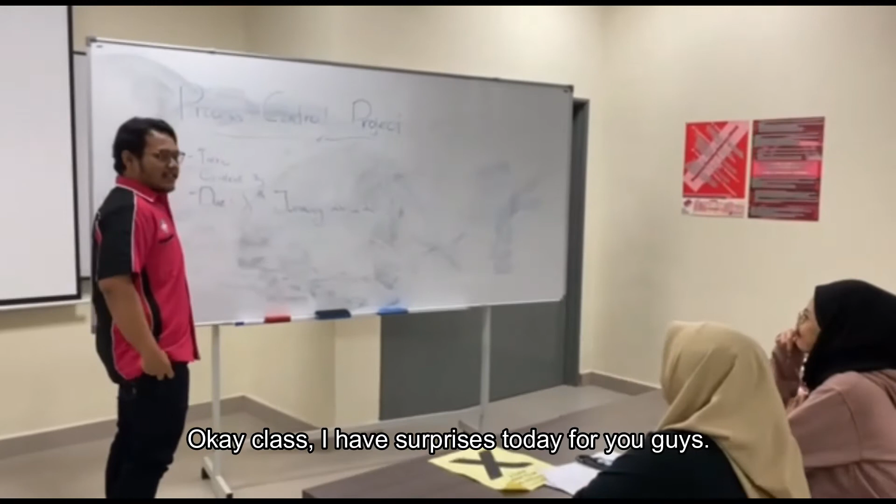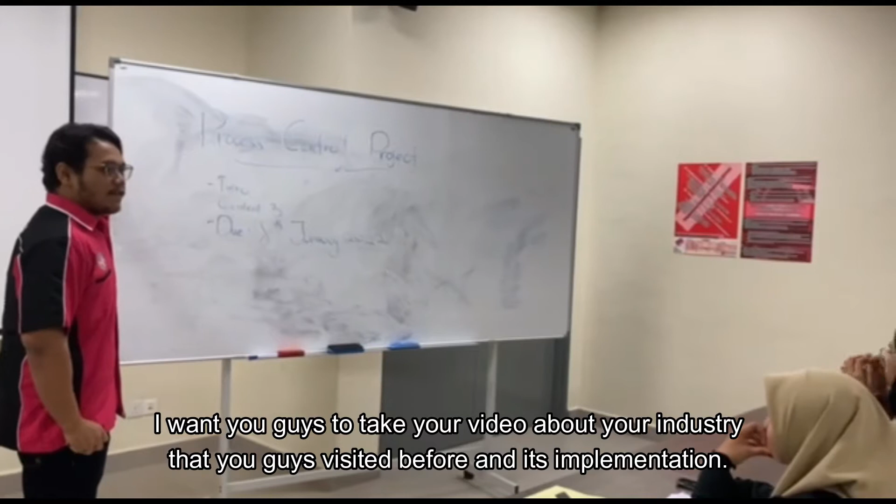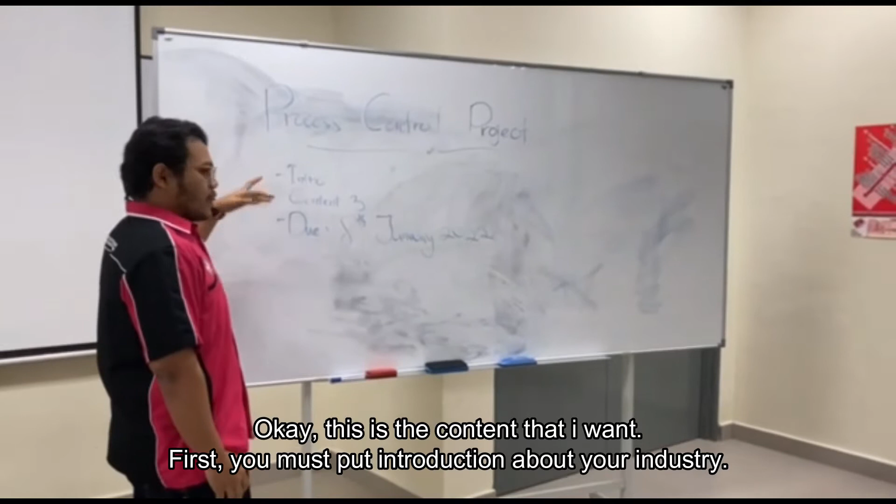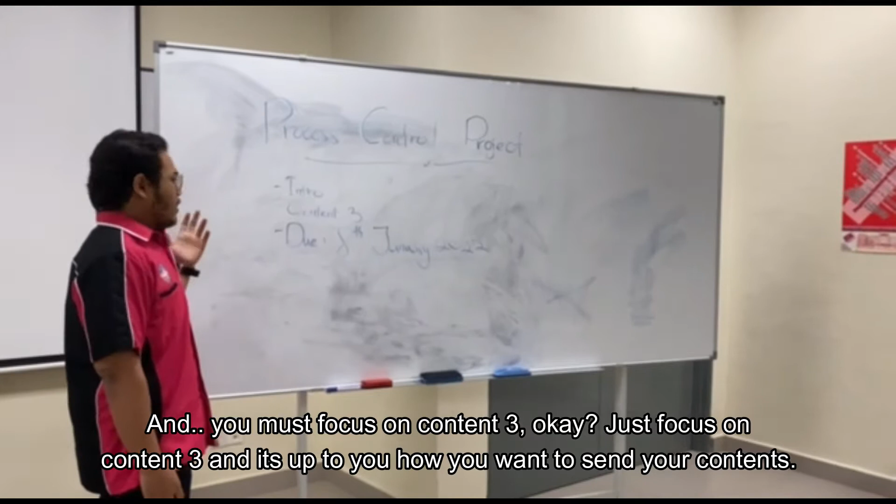For your assignment, I want you guys to make a video about the industry you have visited before, and its implementation. This is the content that I want: first, you must put an introduction about your industry, and you must focus on content 3. Just focus on content 3, and it's up to you how you want to present your content. I want you guys to submit your video on 8 January, this Saturday. Any question?

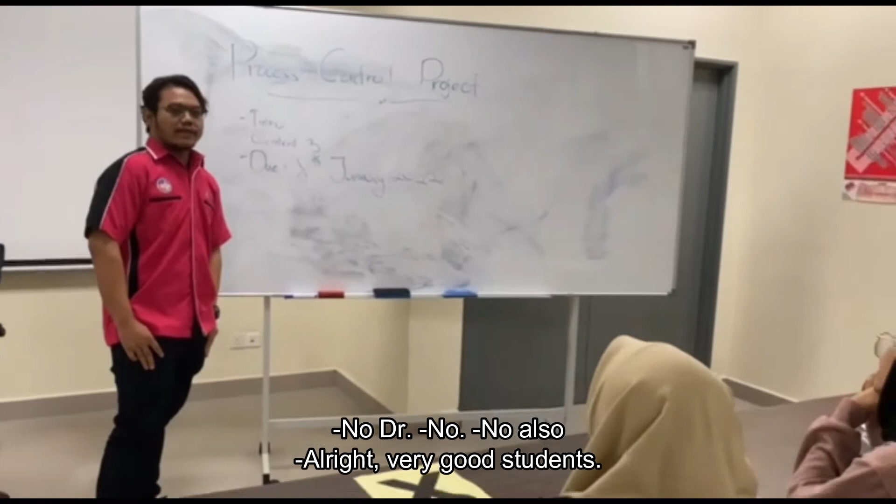No, sir. All right. Very good, student.

Guys, actually, I don't really understand about this project. Actually, I don't understand either, because since we don't visit the industry, we don't get info about this P&ID.

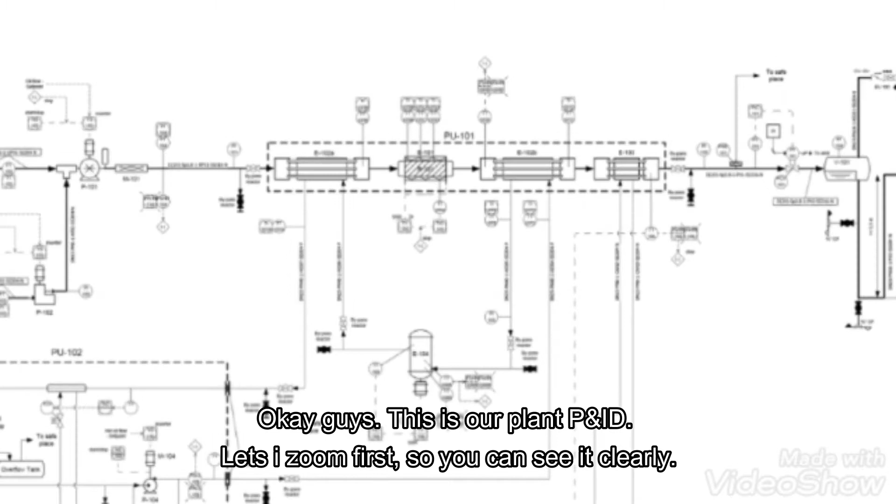Okay, so all of you can refer to the P&ID. Okay guys, this is our plant P&ID. I will zoom it so you can see it clearly. This is our P&ID. Based on the P&ID, our raw materials are oil, rapeseed oil, and methanol.

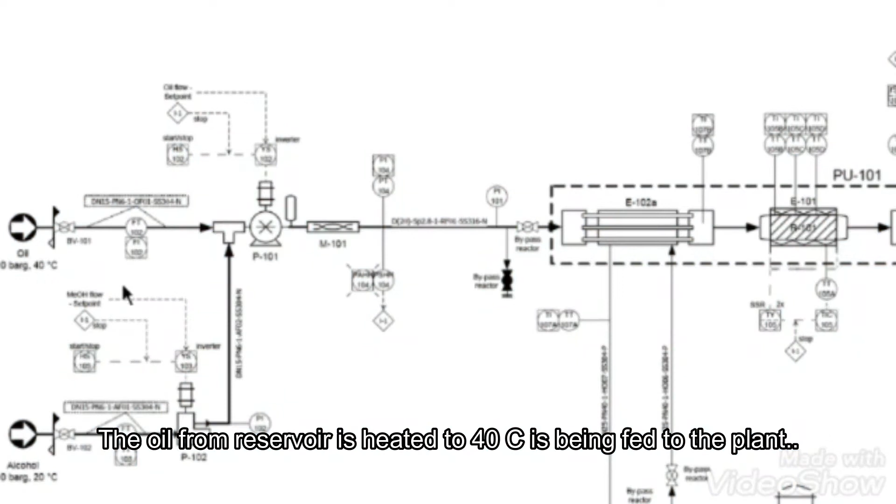The oil from the reservoir is heated to 40 degrees Celsius before being fed to the plant. The alcohol is pressurized in pump 102 and then directed to the main pump 101, where oil and alcohol are mixed. The flow rate of alcohol and oil are regulated to the desired value by the inverter.

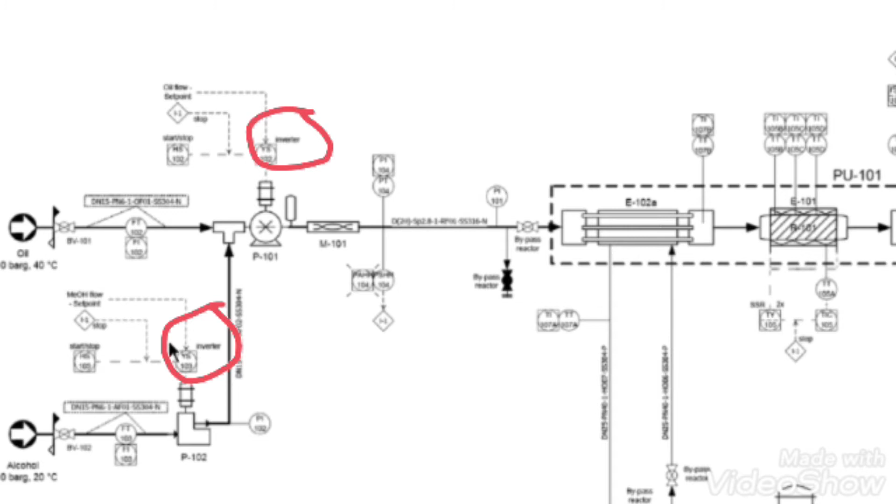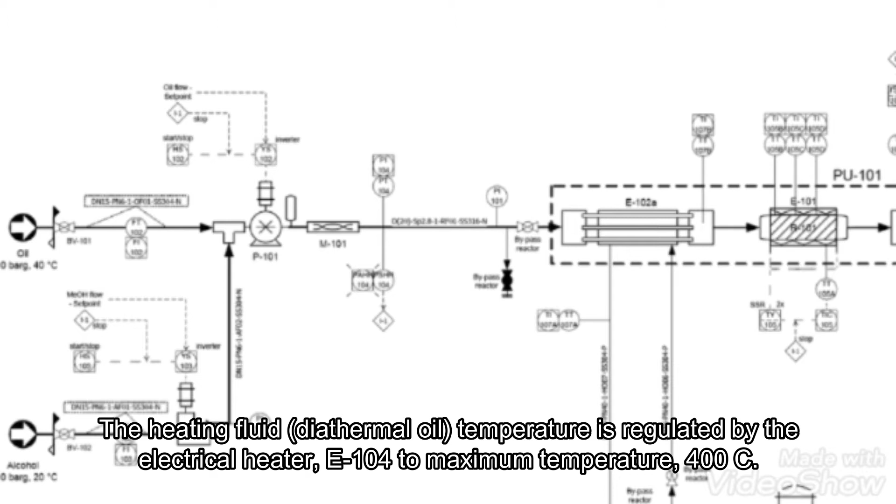Then the compressed liquid alcohol-oil mixture will enter a static mixer 101 and then feed to the preheater E102A. The heating fluid, which is diathermal oil, has its temperature regulated by the electric heater E104, at the maximum temperature, which is 400 degrees Celsius.

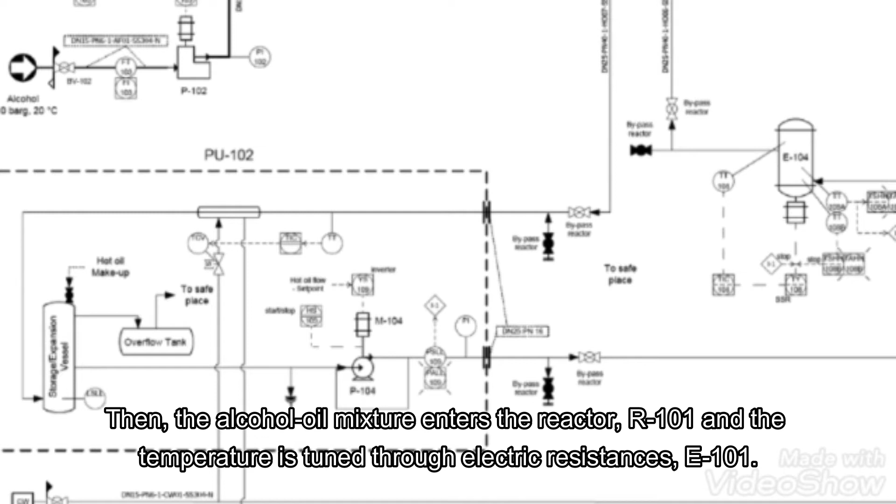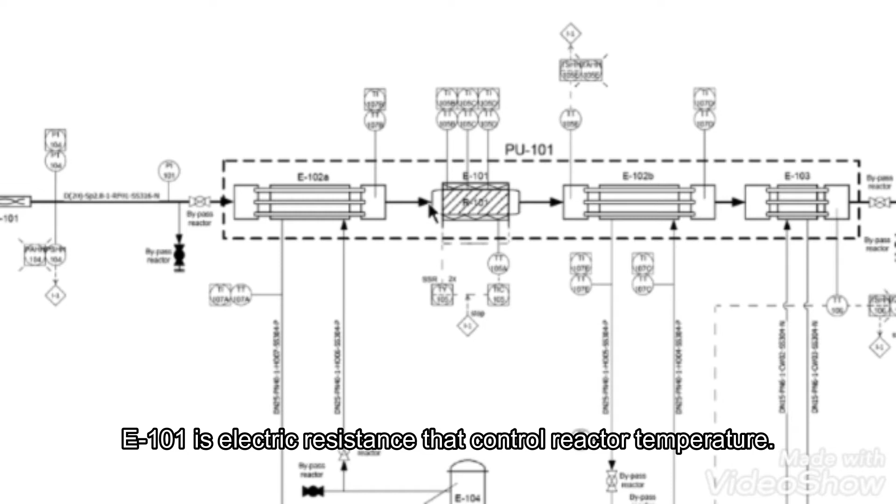The circulation flow rate in the closed loop is ensured by a control unit, PU102. Then the alcohol-oil mixture will enter the reactor R101, and the temperature is tuned through electric resistance E101, which controls the temperature in the reactor.

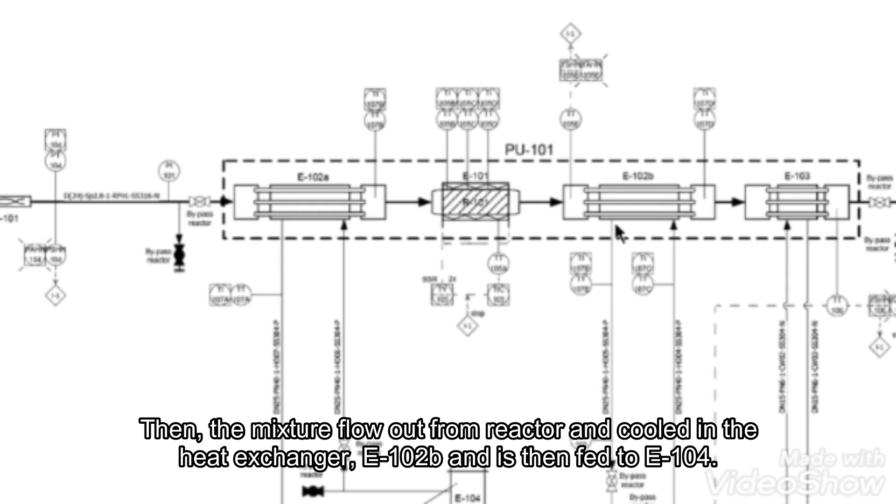Then the mixture flows out from the reactor and is cooled in the heat exchanger E102B. It will cool the mixture, and then it is fed to the E104.

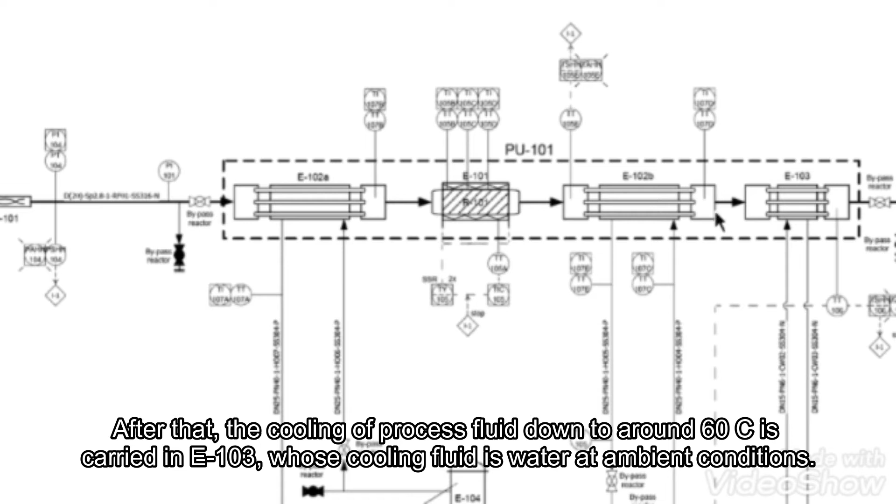After that, the cooling of the process fluid down to around 60 degrees Celsius is carried out in E103. This is the cooling down process, whose cooling fluid is water, at ambient condition.

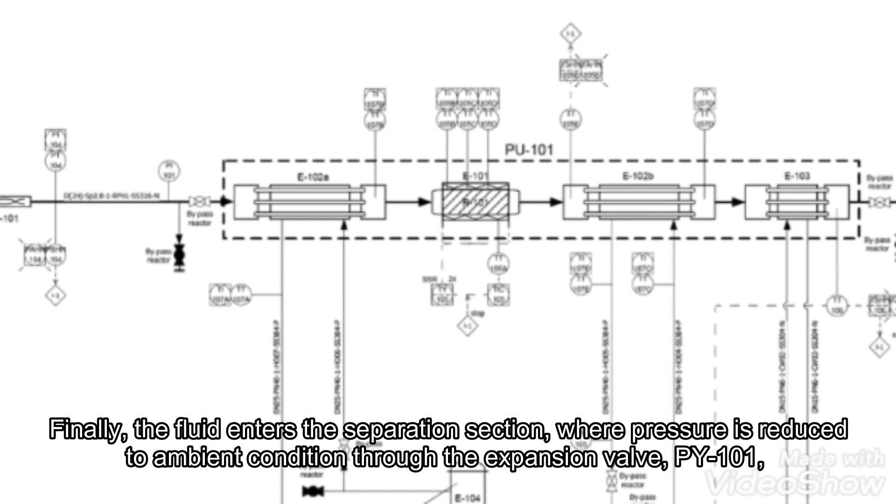Finally, the fluid enters the separation section, where pressure is reduced to ambient condition through the expansion valve PY101. After that, the fluid is conveyed to a decanter for the phase separation. That V101 is the phase separator, and then it will produce biofuels. That's all.

So, Hakim, what is your idea? I think I know what to do about our content for this project. The new control system should be more practical and ideal than the other one. So let me show you some of my ideas.

The current system problem is one I noticed earlier in the system. The input of the flow for both bioethanol and rapeseed oil is manual. This means the risk for the company is higher if any accident occurs.

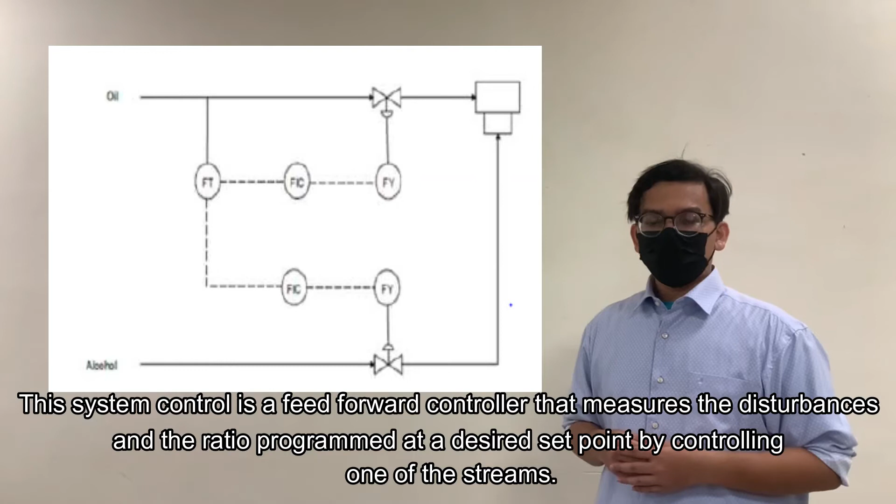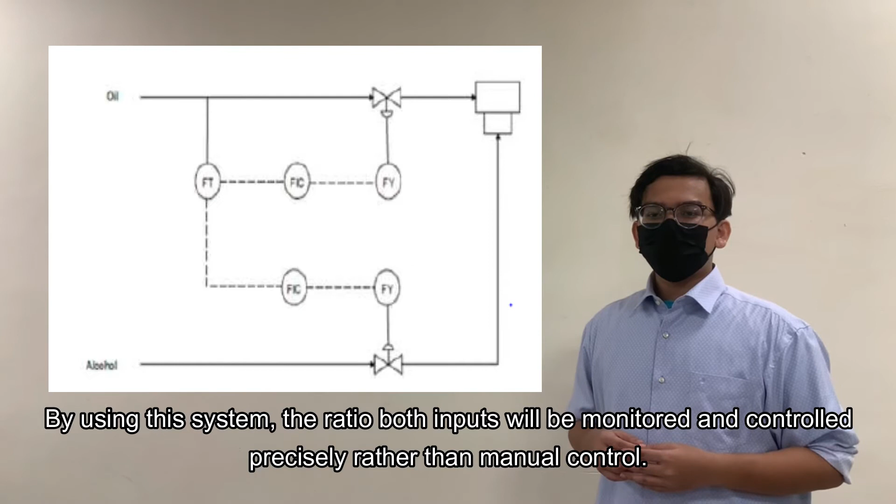So, how about a system that is less time consuming and more effective? The new control system is the ratio control. This system is a feed-forward controller that measures the disturbance and the ratio program at the desired set point by controlling one of the streams. By using this system, the ratio of both inputs will be monitored and controlled precisely rather than manual control.

Okay, Hakim, I have my own idea about this. So let me show you my point.

Okay, so for my point, I have detected some problems, specifically in the right of the P&ID. In that part, there is one problem which is the output of the biofuel. There is no control for the flow of biofuel to the output. So to solve this problem,

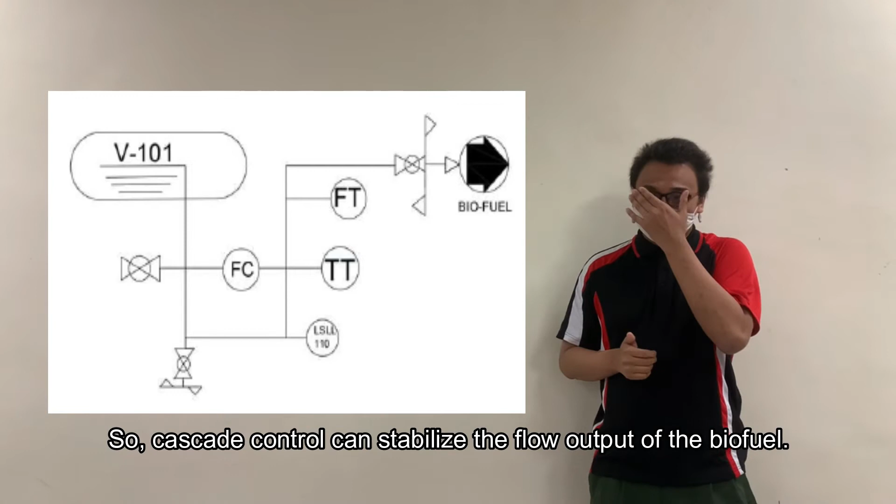I have chosen the cascade control system, which is suitable for this part. Cascade control can stabilize the flow output for the biofuel.

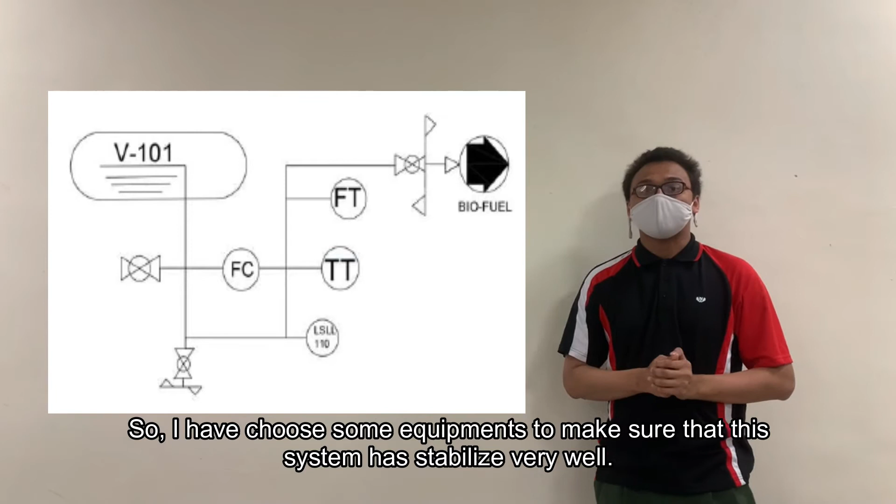So I have chosen some equipment to make sure that this system is stabilized very well. The first one is the flow transmitter. This equipment can transmit and give measurements for the flow signal.

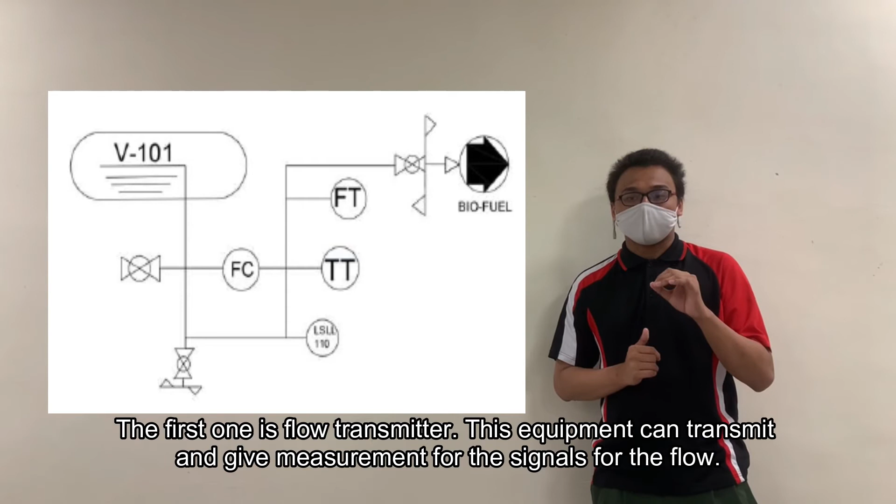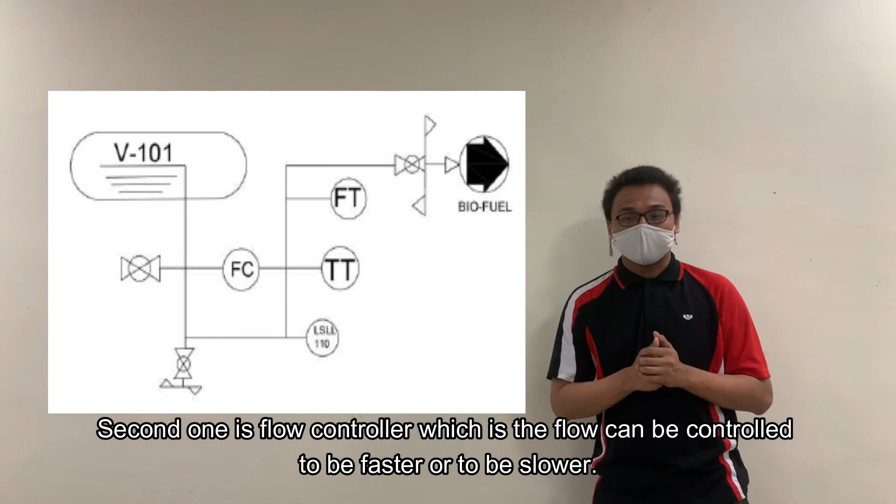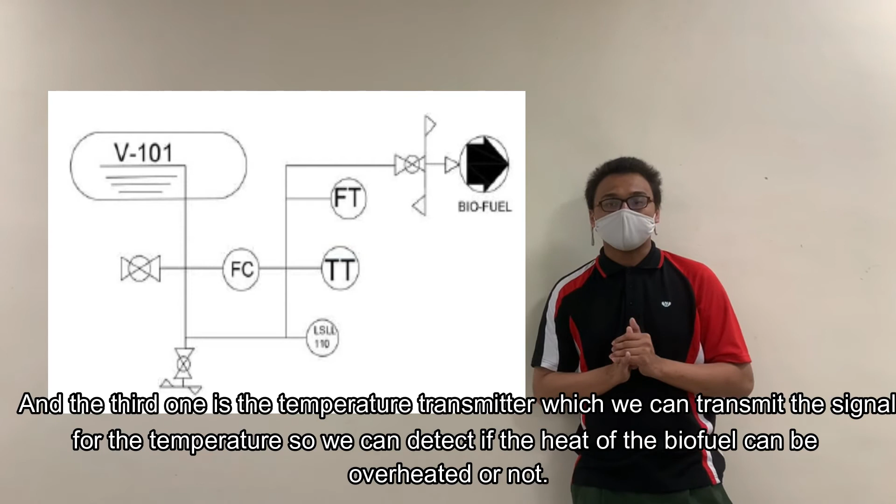The second one is the flow controller, which controls the flow to be faster or slower. And the third one is the temperature transmitter, which transmits the signal of the temperature, so we can detect if the biofuel is being overheated or not.

So the next current system problem: generally it becomes a necessity in industry to consider the amount of mixture flow to the next stage. The stream rate in this segment should be changed so that no mistakes happen. It ought to also be done to prevent any mishaps to the employee working in the division, thus decreasing the danger of injury in the workplace.

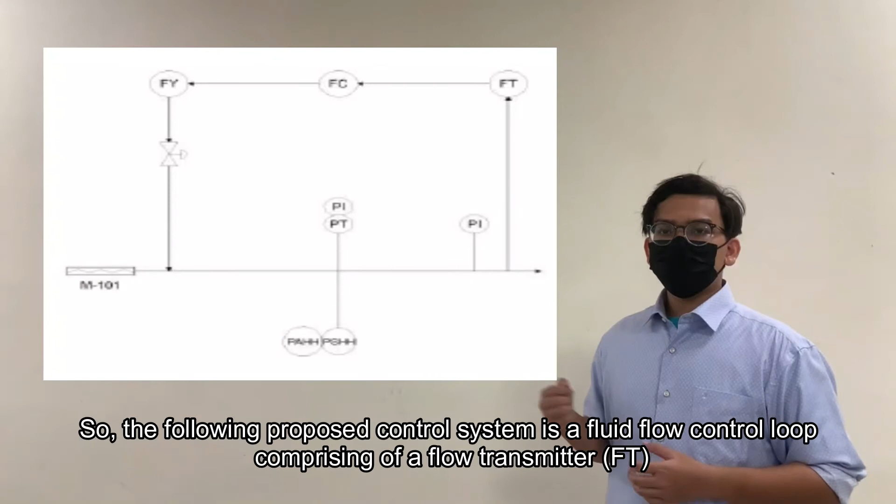So, the following proposed control system is a fluid flow control loop comprising a flow transmitter, FT, that serves as a stream rate detector for a combination of rapeseed oil and bioethanol fluid through the line.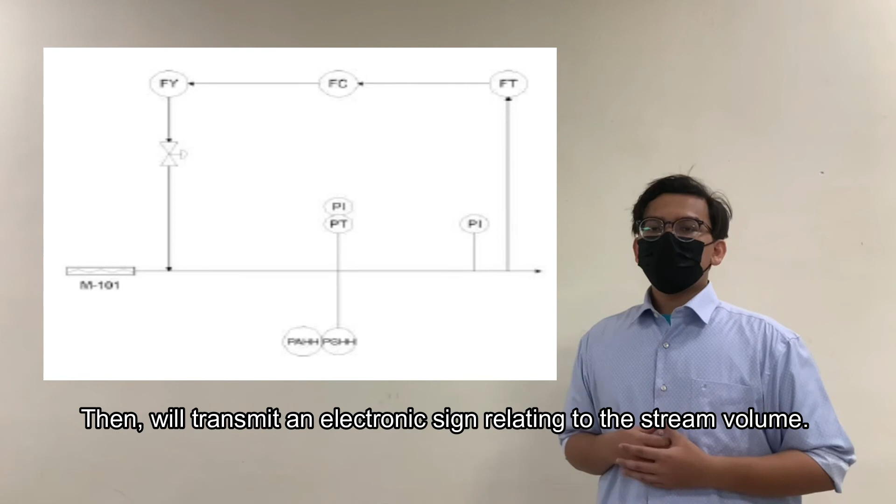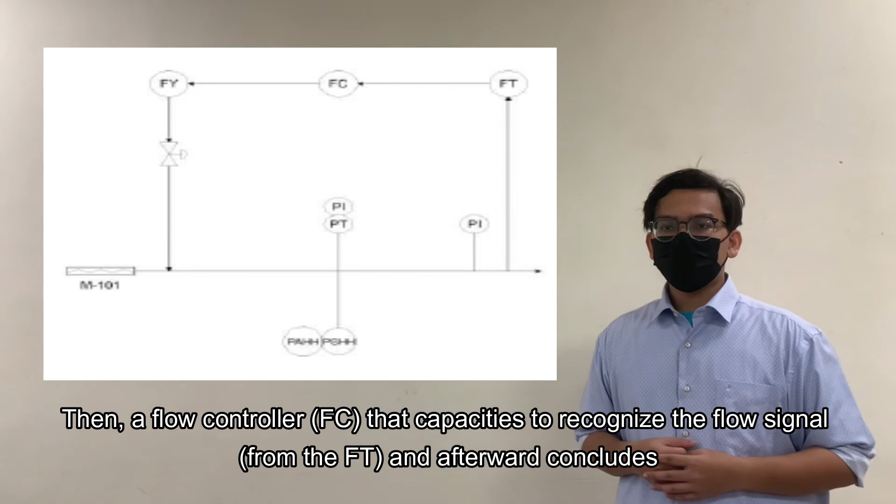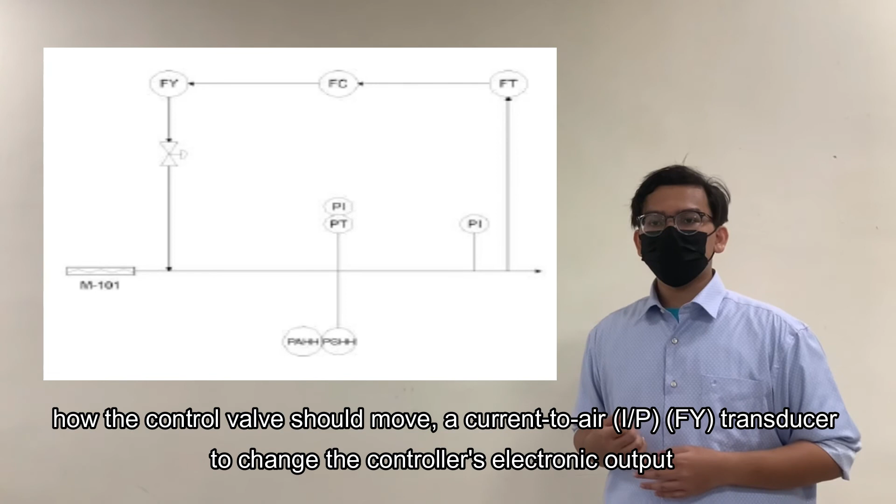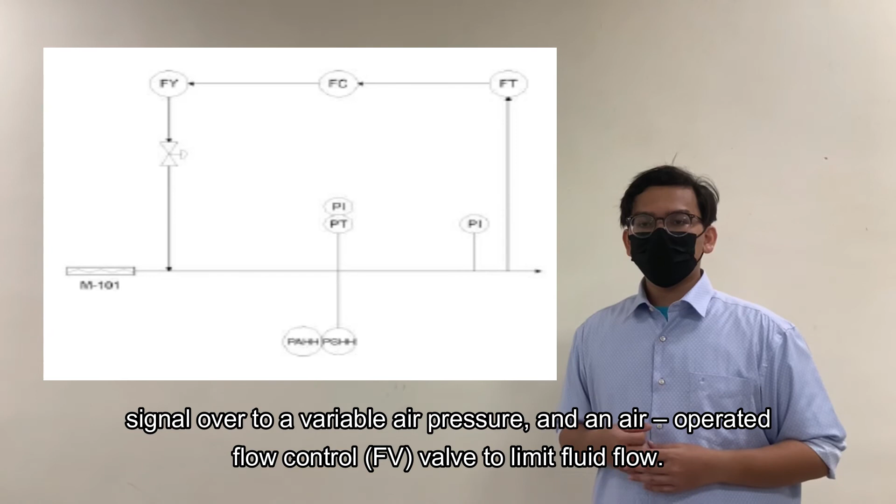It will then transmit an electronic signal relating to the stream volume. Then a flow controller, FC, functions to recognize the flow signal from the FT and decide how to control the valve. A current-to-air transducer, FY, changes the controller's electronic output signal over to a variable air pressure, and an air-operated flow control valve, FV, to limit fluid flow.